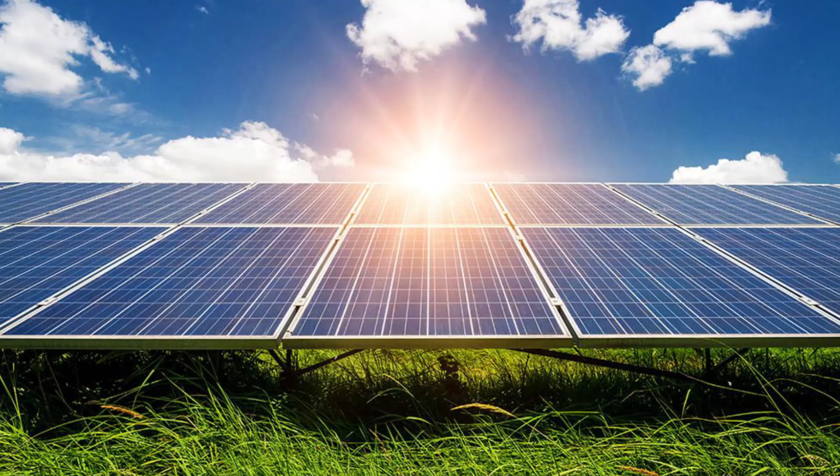Welcome partners and colleagues. Today we are excited to share with you the launch of our new Grundfos Go Solar app and the expansion of the SQFlex renewable energy powered submersible range with 5 new high-speed models. My name is Tom Drew and I am the Global Business Development Manager for the Grundfos Solar product range, and I am pleased to be your host for today's events.

Our presentation will cover the following: Grundfos' ambition within the renewable energy powered water pumping market, a review of our solutions including details on each product's operation range and applications, a visit to our SQFlex factory in San Luis Potosi, Mexico, where you can see how our products are built and quality checks that go into each stage of manufacturing, an outline of the resources that are available to help you select and size Grundfos Renewable Energy Power Solutions. The presentation will conclude with a question and answer period.

With that, I'm pleased to share with you a message from Group Senior Vice President of Global Water Utility Sales, Dieter Sauer. Hello, I'm Dieter Sauer. I'd like to share with you Grundfos' ambition for renewable energy-powered water pumping systems. Today, solar and wind-powered solutions are a growing market, giving people, businesses, and communities the opportunity to use non-traditional energy sources to deliver water. As part of our mission, Grundfos strives to develop pumping technology that not only reduces environmental impact, but also improves the quality of life for people around the world.

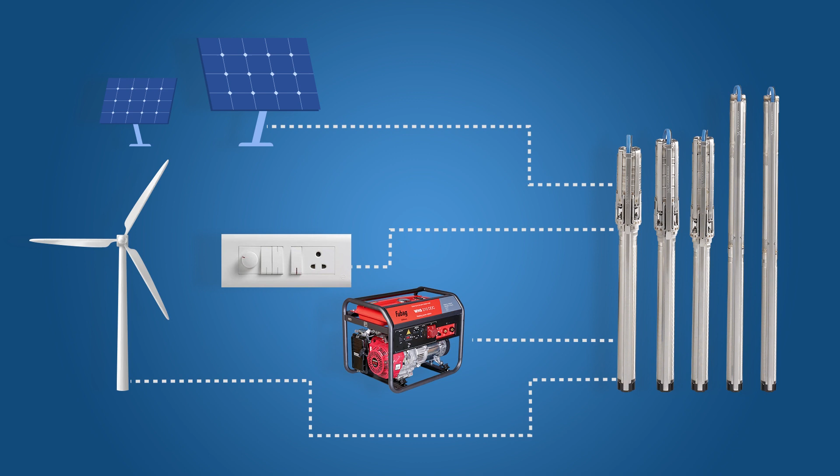SQFlex is by far the most popular Grundfos product when it comes to solar water pumping solutions. SQFlex runs primarily with solar energy with an optional alternate backup power source. Plug and pump. This is how SQFlex can be described in 2 words. Easy installation with no additional components or setup for basic operation, and minimal maintenance makes SQFlex the most user-friendly solar pump in the market. Several 100,000 installations across the globe is the testimony to this feat.

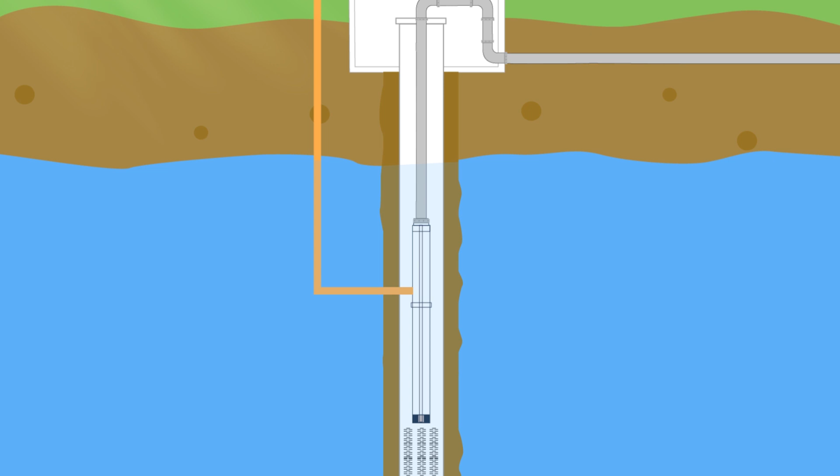Remarkable features that make SQFlex customer-friendly are the built-in electronics that comprise built-in drive and built-in motor protection for optimal performance and protection against external factors that affect the pump performance. Built-in drive offers 4 functional benefits such as the pump can operate with both AC-DC power supply. The pump can run in a wide voltage range, meaning the pump can start early in the morning and go on late in the evening.

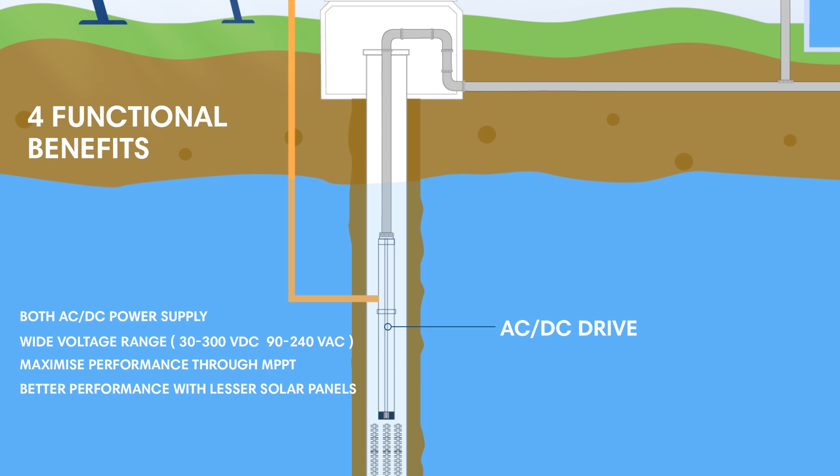The drive has inbuilt MPPT that helps to maximize pump output with available solar energy. The pump delivers higher performance with fewer panels thanks to the high-efficiency permanent magnet motor. Built-in motor protection protects the system against 8 potential risks that might affect pump performance such as over-temperature, surge protection, over-voltage, under-voltage, overload, dry running, polarity protection, and hydraulic shock.

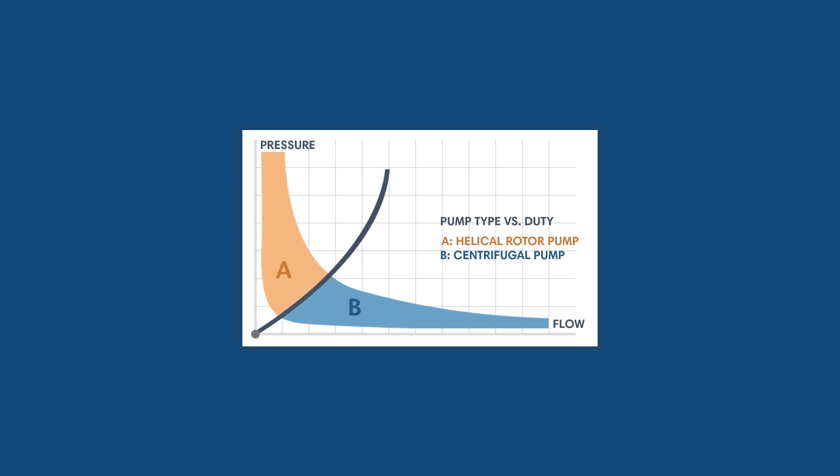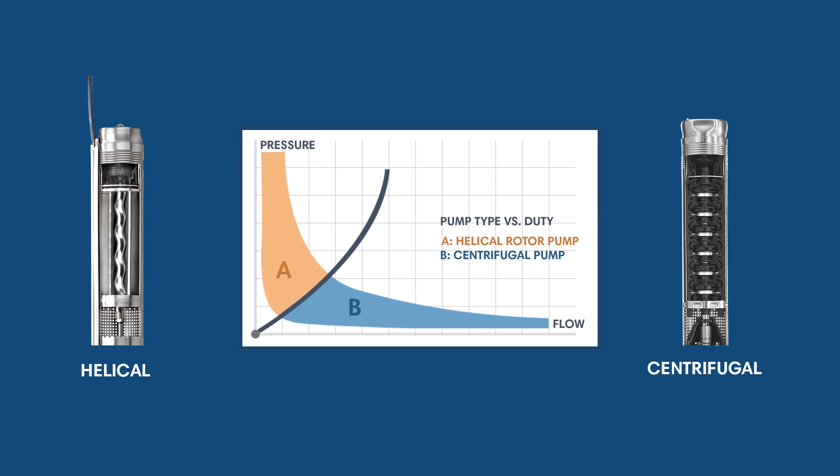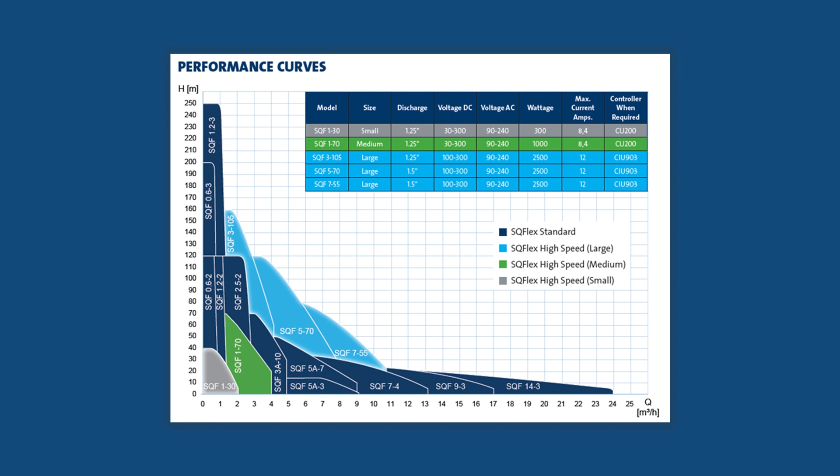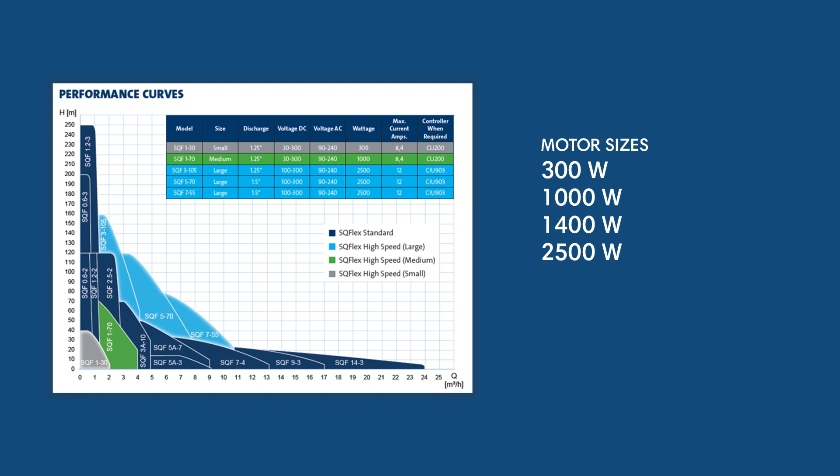Speaking of the design, the SQFlex product line is available in 2 different hydraulic designs, Helical Rotor and Centrifugal. The Helical design is good for low-flow, high-head applications, whereas Centrifugal design is suited for high-flow and low-head requirements. With the addition of 5 new hydraulics in small, medium, and large sizes, SQFlex is now available in 16 different models. These 16 models are powered by 4 motor sizes, 300, 1000, 1400 and 2500 watts, and are available in 2 material variants, SS304 and SS316. The entire range gives the flexibility to the users to customize the system, regardless of the location, depth of water, and volume required.

Though the pump has built-in features for optimal operation and motor protection, CU200, an external controller, can be connected to monitor the performance of the pump. We can also monitor the system performance remotely through GRM, Grundfos Remote Management, by just adding the Grundfos CIM module. Grundfos GRM works through the GSM network.

SQFlex is used in a variety of application areas. It is specially suitable for supplying water in remote locations, but it can also be used in commercial buildings such as schools or hospitals, farms, lakes, and in conservation areas. Next, we are going to shift our focus on SQFlex.

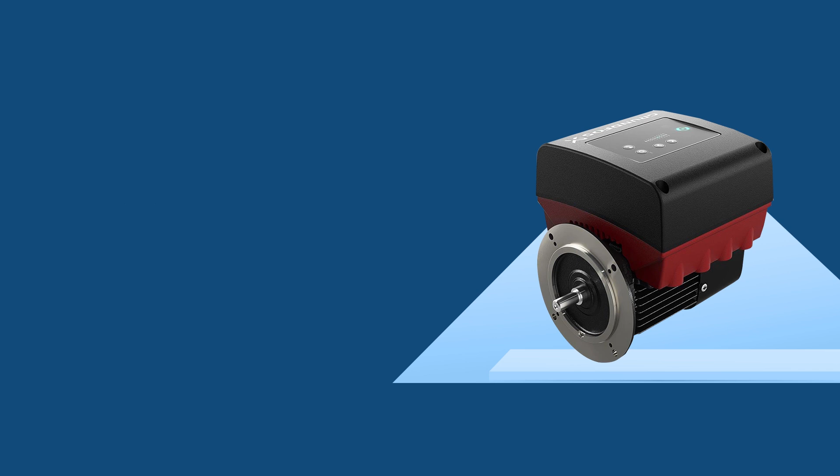Now, let's look at how Grundfos MGFlex motor utilizes solar power for applications where CR pumps are typically used. MGFlex has been developed by Grundfos specifically to be used in surface pump applications using solar power. It runs with permanent magnet technology with a built-in inverter that helps the motor to operate at maximum efficiency. This allows the MGFlex motor to provide the CRFlex surface pump with necessary power to be used in remote rural applications including irrigation, community water supply and livestock watering.

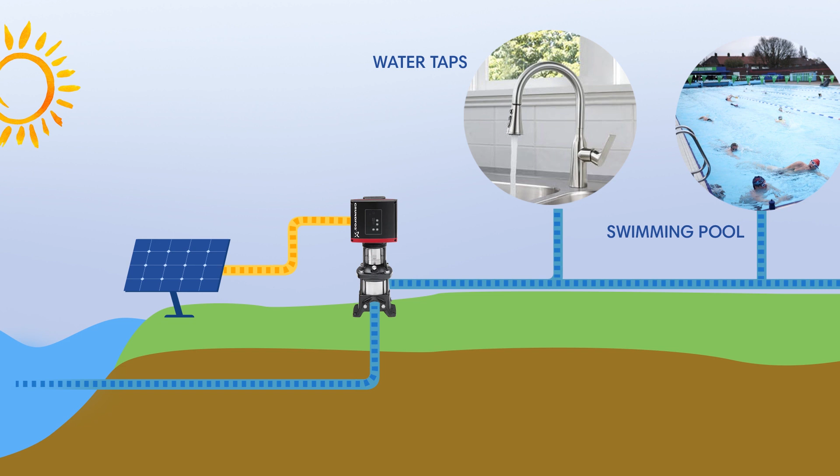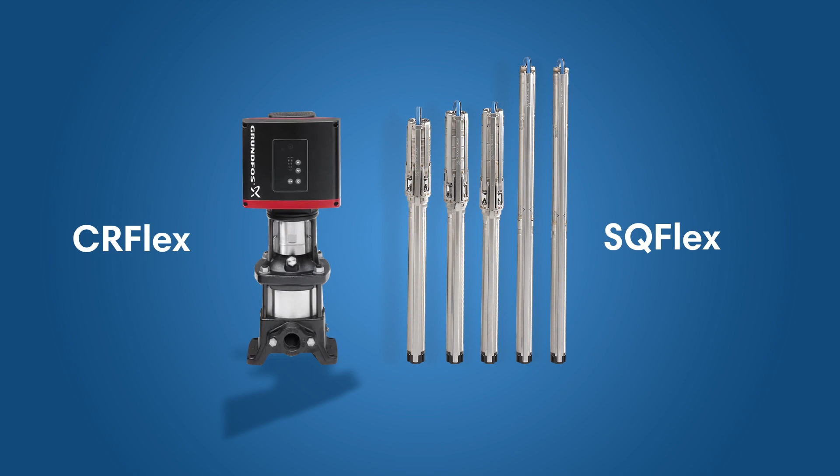It can also provide power to CRFlex pumps in domestic buildings in rural areas or towns. Relevant applications in this respect include a pressure boosting system to ensure reliable pressure at the tap and swimming pools. In many ways, the advantages of the CRFlex running with MGFlex motors mirror those with the SQFlex pump. For instance, both pumps can be tailored and customized to any application and local conditions, meaning that they are delivered as plug-and-play solutions, which also ensures it is very easy to install.

Its built-in protection means that it requires very little maintenance, and finally, its high efficiency results in the requirement of a lesser number of solar panels, thereby reducing the cost and space required. Furthermore, MGFlex is a versatile product that can be connected to a number of different pump types.

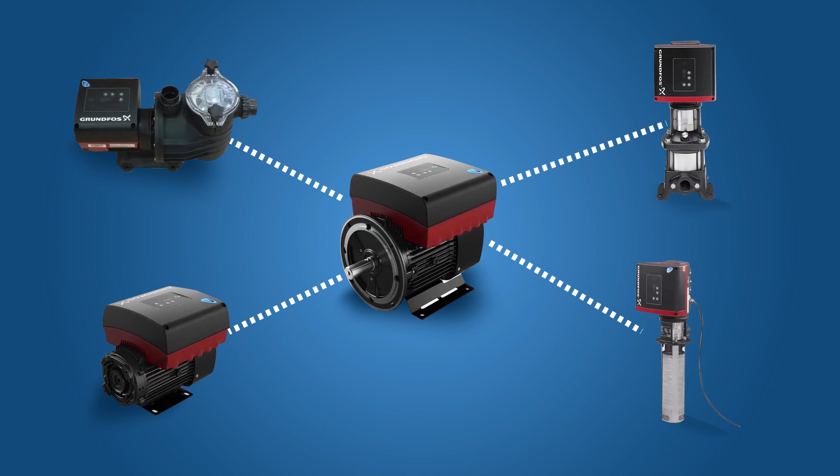Grundfos Renewable Solar Inverter. The RSI is an external drive designed to convert DC power from solar panels to AC power supply for pump operation. RSI is designed to operate a broad range of three-phase submersible and surface pumps. Grundfos RSI, which were running pumps up to 37 kW, 50 HP, since their launch in 2016, can now power a variety of pumps up to 250 kW, 340 HP. This helps us to use solar energy for various municipal, irrigation and industrial pumping applications. What makes RSI unique in the market is that it is extremely quick to set up.

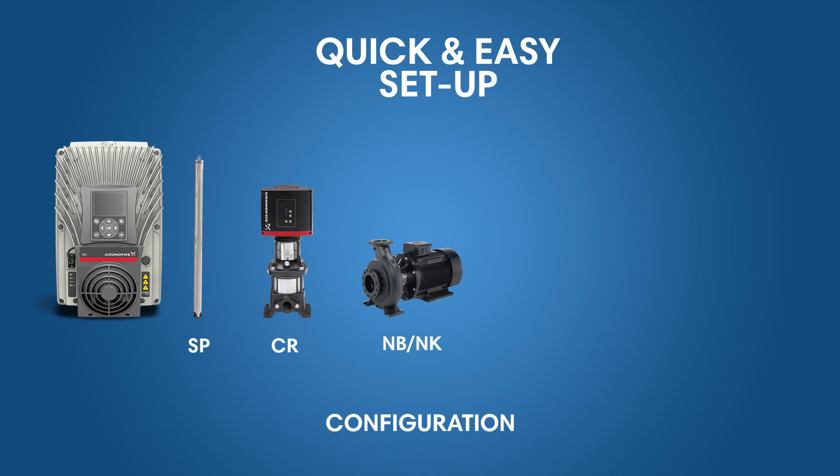The quick setup wizard helps one to configure the inverter for a number of Grundfos pumps such as SP, CR, NB, NK, CM, MTR and TP in just less than 5 minutes, demonstrating its flexibility and unmatched simplicity. All you need to do is to confirm which pump type is in use and enter basic motor and panel details. The RSI is up and running.

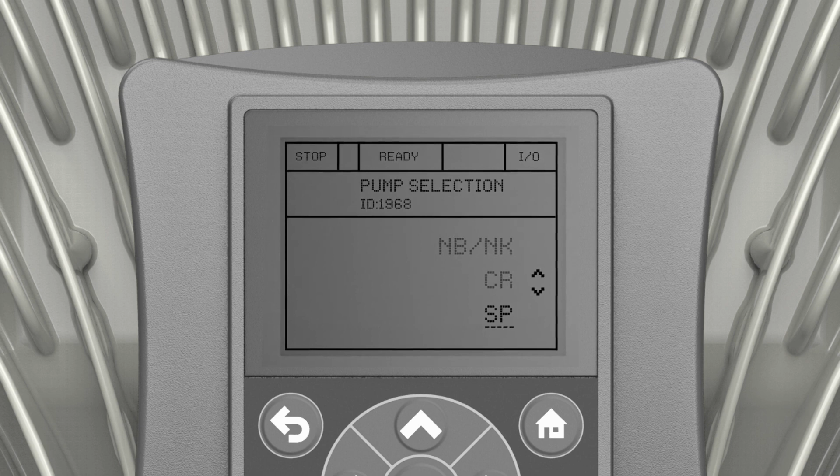RSI is even easier when set up in the workshop for plug and pump on site. RSI along with the Grundfos SPE submersible pump with high efficiency permanent magnet motor forms the best-in-class solar pumping system up to 45 kW, 60 HP, that requires fewer solar panels and less space. The RSI comes standard with an IP66 weatherproof enclosure up through the 37 kW, 50 HP model, eliminating the need for any other outdoor protection.

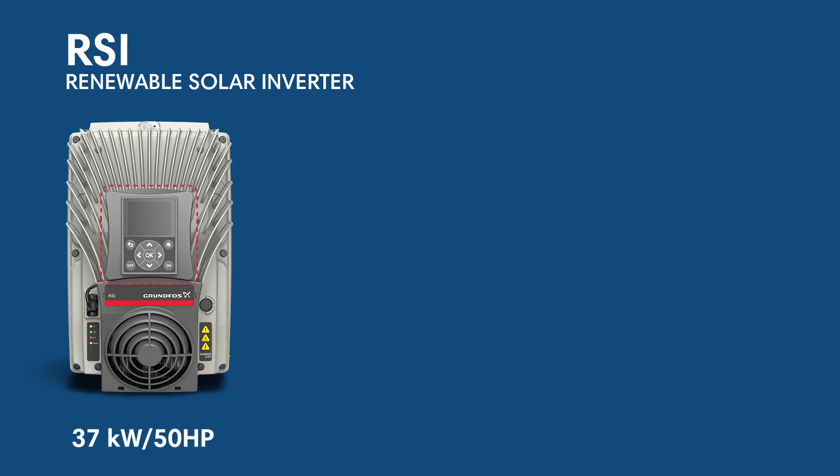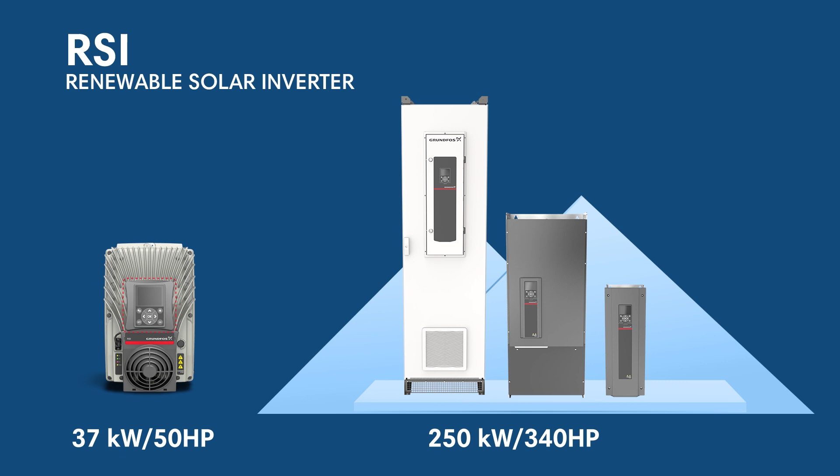Another noteworthy benefit is that the electronic display on the inverter is removable and helps prevent the settings from being tampered with. It can also be passcode protected. RSI above 37 kW, 50 HP are available in IP21 and IP54 enclosures.

Grundfos takes pride in continuously providing innovative water solutions and setting new benchmarks. The Grundfos Power Adapt is no exception. Maintaining a constant power supply in a solar pumping system is a challenge, but Grundfos Power Adapt combined with RSI makes it possible. Pumping applications like water treatment, pressure boosting and municipal water supply need 24/7 constant power supply to enable continuous operation. Providing consistent solar energy through inverters is not possible throughout a 24-hour day. To ensure continuous power supply for the pumps, Grundfos introduces the Power Adapt.

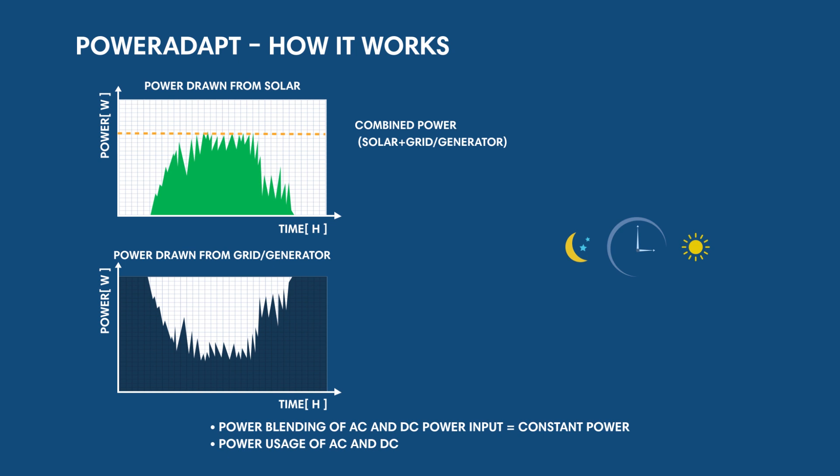When installed with the Grundfos RSI, power can seamlessly be blended together from two different sources, DC and AC. The RSI will use DC solar energy as the primary source and blend in AC power when required to ensure the pump and motor operate at top performance. The Power Adapt will protect the system to allow continuous operation 24/7. Power Adapt is compatible with Grundfos RSI up to 37 kilowatts, 50 HP, and the enclosure is rated for outdoor installation. Other salient features include protection against phase loss, over temperature and backfeeding, a power on delay timer for automatic coupling back to AC, and remote monitoring compatibility.

Go Solar app. Adding to all this, Grundfos has launched a successful mobile solar sizing app for quick and easy sizing on the go. The Grundfos Go Solar app is a simple tool for complex sizing needs to break boundaries not only geographically but digitally. The built-in tools and calculators allow you to size solar-powered systems. The app is available for Android and iOS operating systems in 5 different languages. Download now and let's make your sizing process easy.

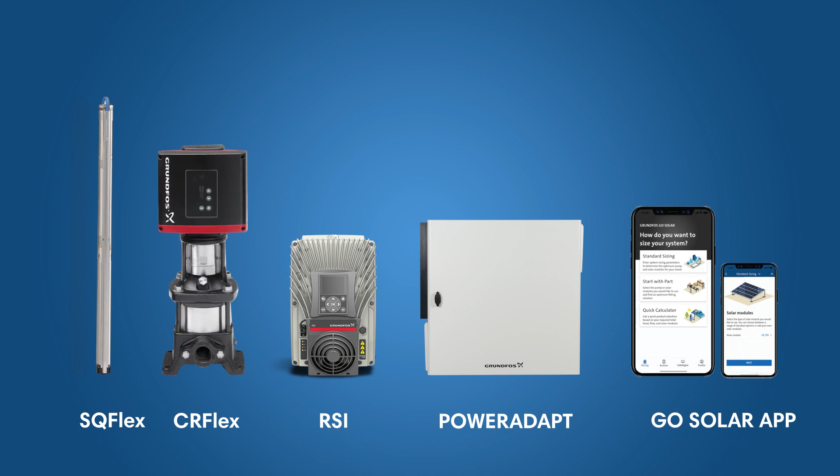Conclusion: that covers features and benefits of the entire range of the Grundfos solar product portfolio: SQFlex submersible pump, CRFlex surface mounted pump, RSI Renewable Solar Inverter, Power Adapt, Power Blender and Grundfos Go Solar app. A solar pumping system using any of these Grundfos products ensures not only reliable operation but also energy efficient and cost efficient solutions.

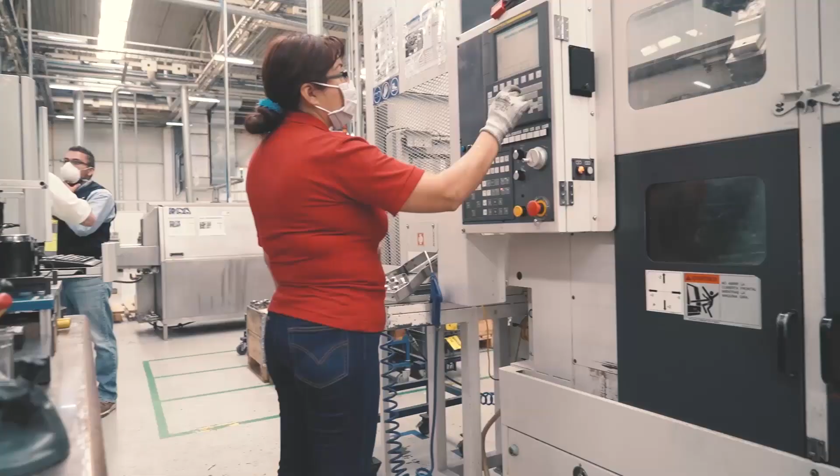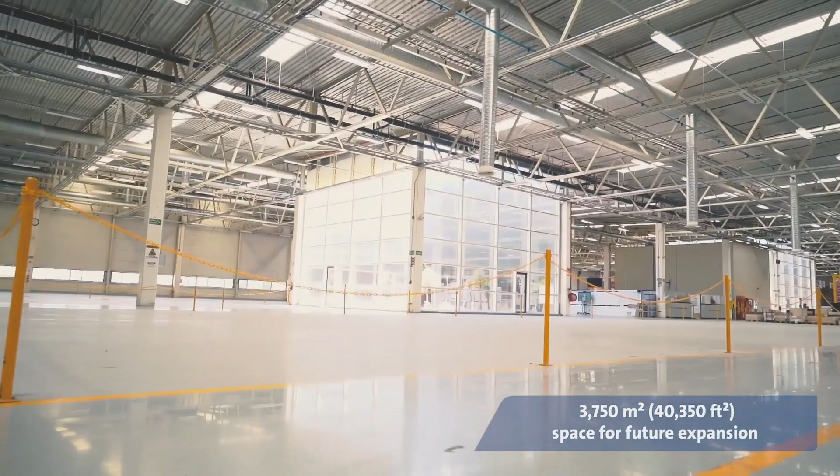Welcome to the Grundfos San Luis Potosi, Mexico manufacturing facility. This 15,000 square meter, 161,400 square foot facility has been in operation since 2007. Currently, there are 280 employees, including engineers, quality inspectors, machine operators, and assembly technicians. There is also about 3,750 square meters or 40,350 square feet of available space under roof for designated expansion with enough adjoining property to double the facility's current size.

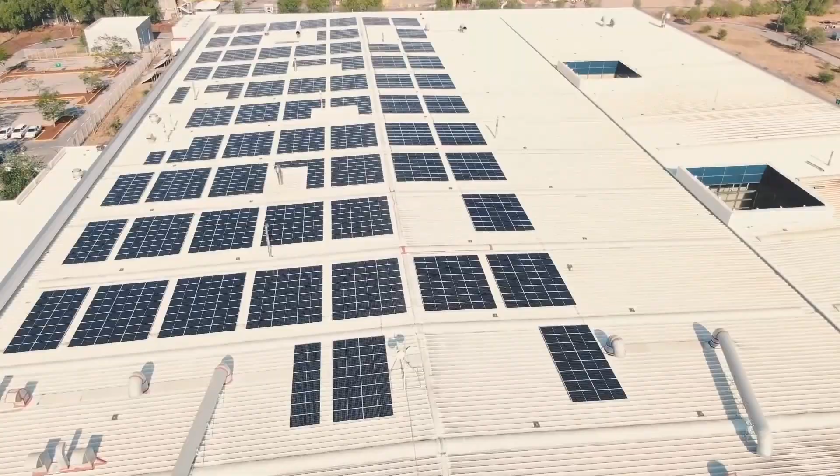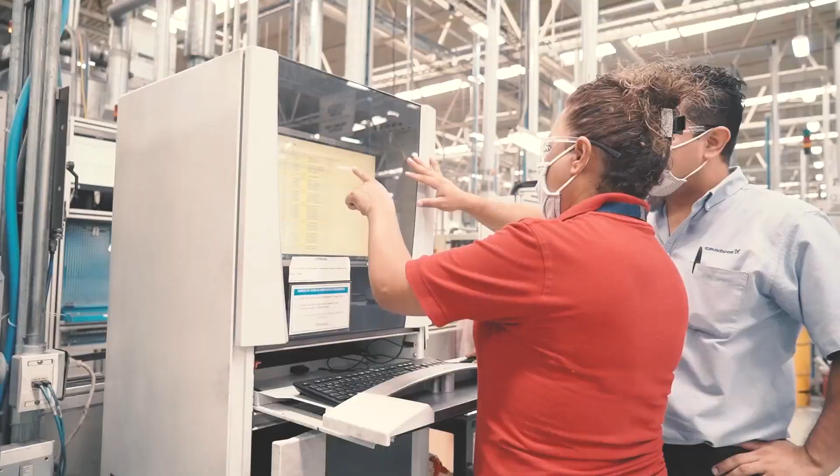On average, this facility will produce 172,000 pump and motor units per year. 49,000 plus of those units are SQFlex solar products. Grundfos San Luis Potosi is certified to 3 current ISO standards and has received numerous awards in manufacturing excellence and safety. Today it is my privilege to introduce you to the team of experts at Grundfos San Luis Potosi to show you our SQFlex submersible pump and motor assembly operation. This includes our 5 new high-speed SQFlex models, which we are excited to be releasing into the market.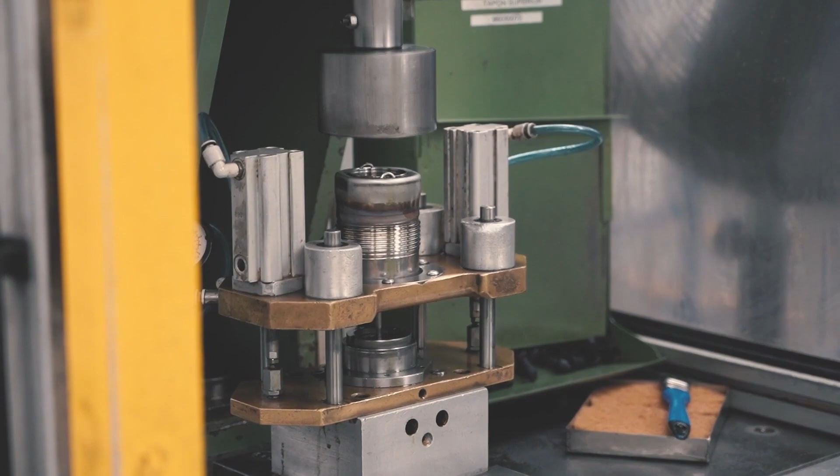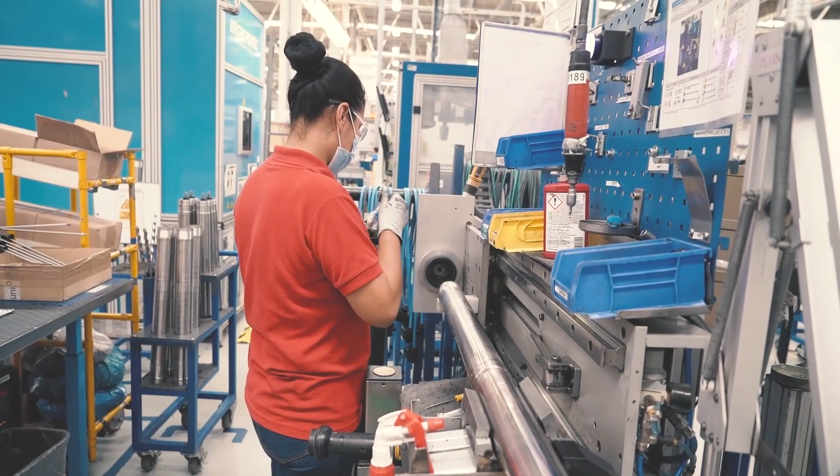The SQFlex is Grundfos' renewable energy, solar, DC, and AC powered submersible pump and motor. It includes many built-in features and benefits not found in any other products. The manufacturing and assembly process includes components from several Grundfos sister facilities and qualified vendors from around the globe. With over 100 quality checks, we can assure you, our customers, that you receive a quality product that will provide reliable service for years to come. So, let's get started.

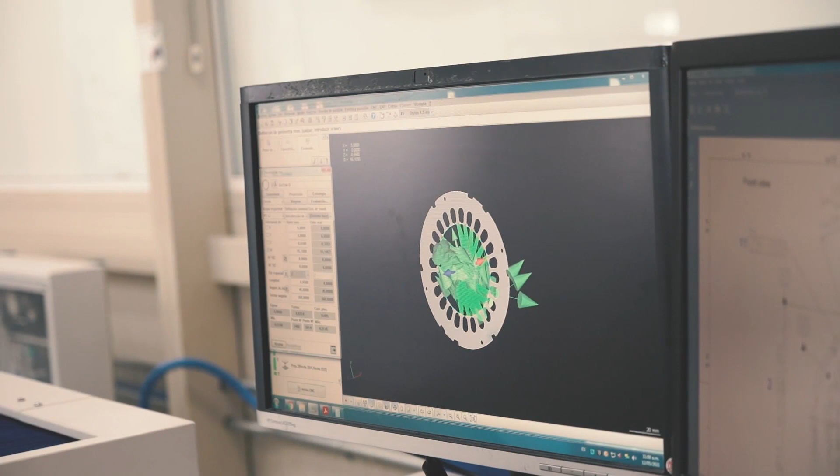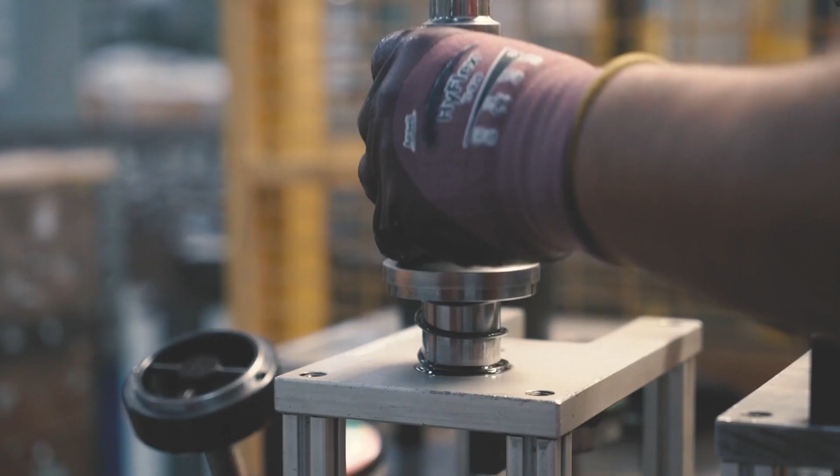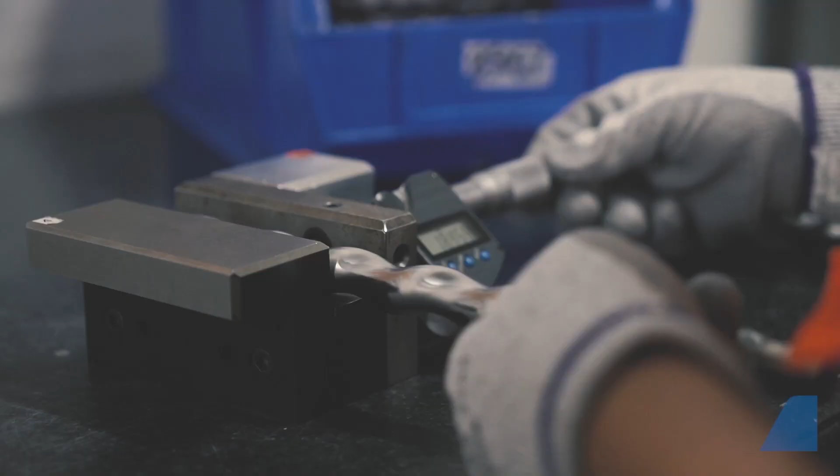It begins with our incoming quality inspection and machining center. Motor electronics are received from our Grundfos sister facility in Denmark. These components are pre-tested and inspected by our colleagues before their arrival here and assembled with the motor. Helical rotor and stator components are reviewed, measured, and matched per assembly specifications.

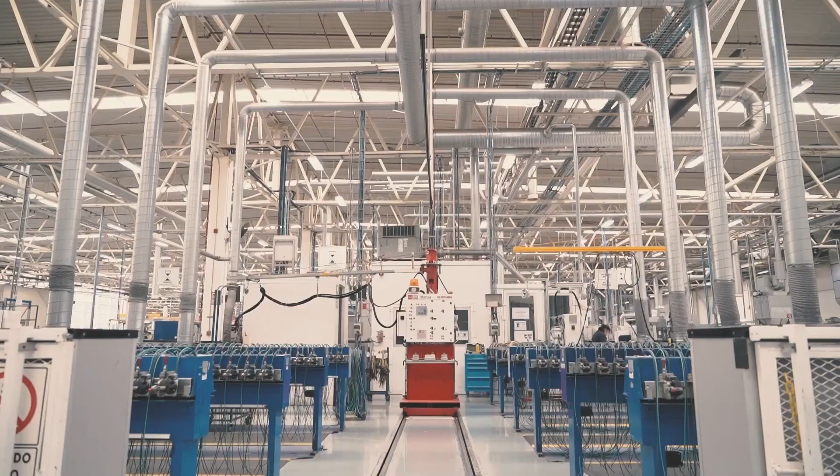Key components such as motor lamination stacking, windings, and motor leads, along with many other components, are all Grundfos in-house manufactured and tested. This assures that our high-quality standards are maintained and these components are readily available. Subassemblies such as the discharge head with non-return check valve are assembled, welded, and tested, all prior to being sent to be part of the final pump assembly.

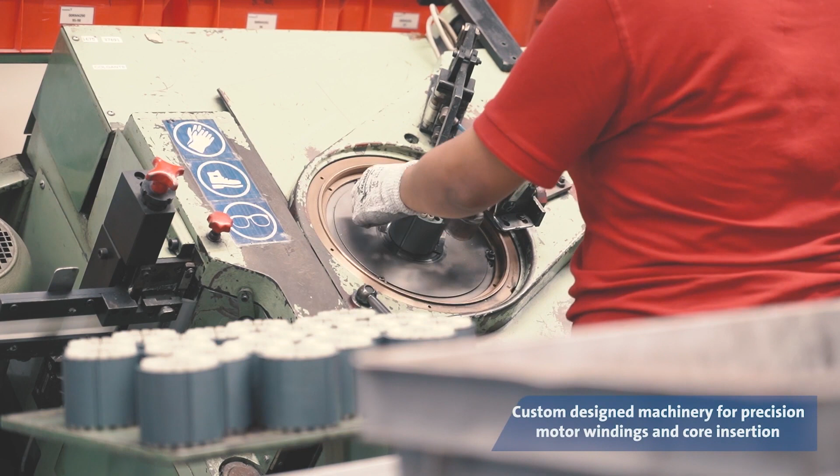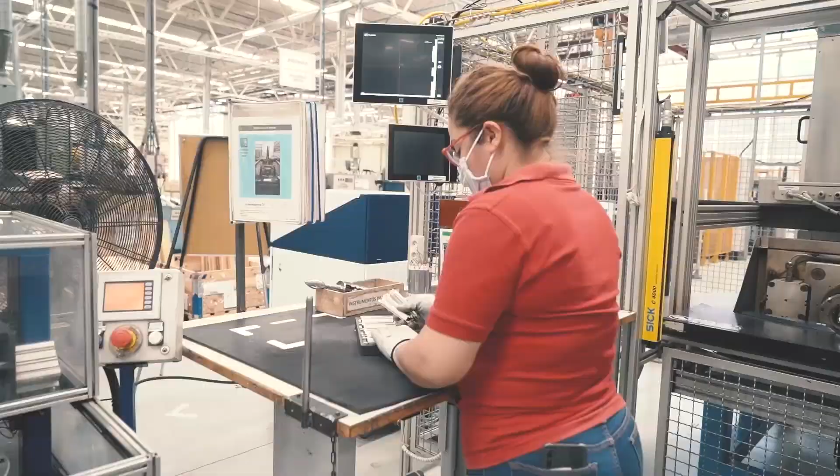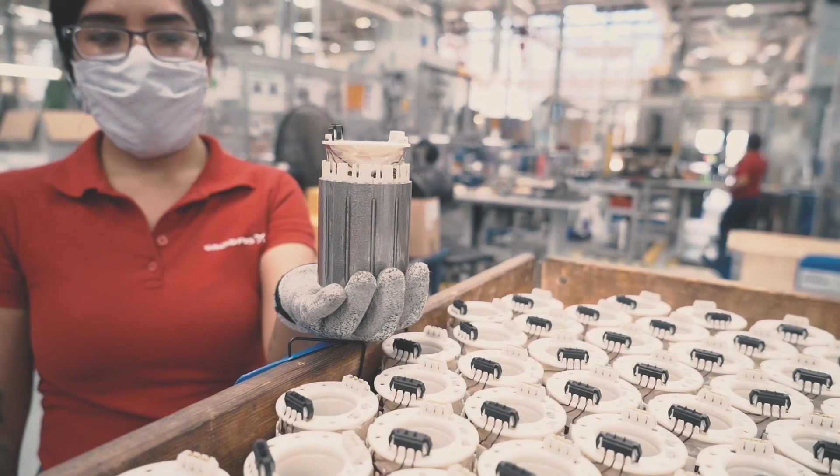Precision motor windings and core insertion are controlled with Grundfos-specific designed machinery. All pumps and motors manufactured in San Luis Potosi are assembled by highly skilled and trained certified personnel. Once the motor stator winding assembly is complete, it is ready for testing. All stators are tested to ground and resistance is measured along with a high voltage test.

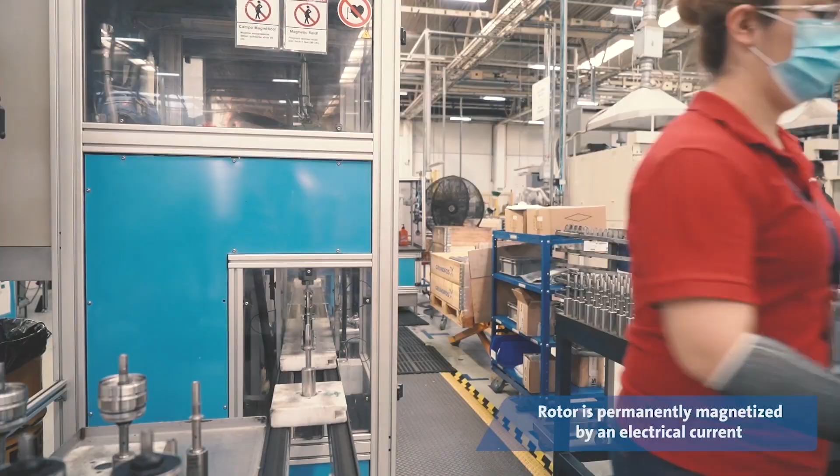In a separate process, the rotor that has been pre-tested in Denmark is magnetized by applying an electrical current. This process permanently magnetizes the rotor. The magnetized rotor, rotor can, thrust bearing, and connector are all then welded together before being glycol filled and sealed. The rotor unit assembly is now complete.

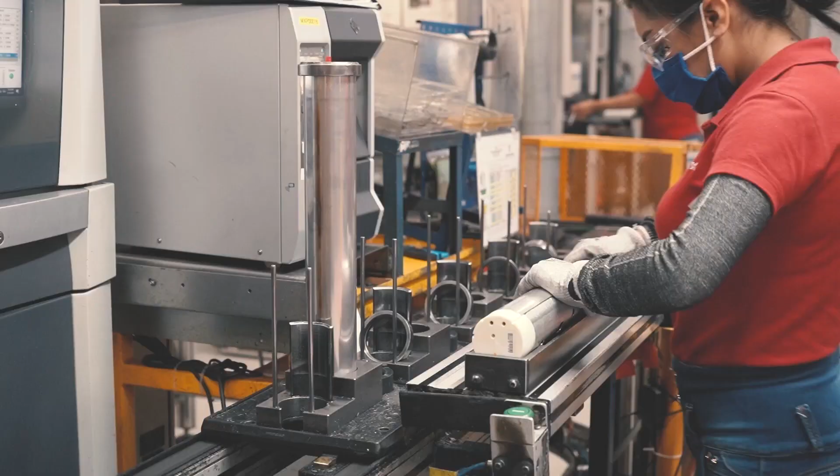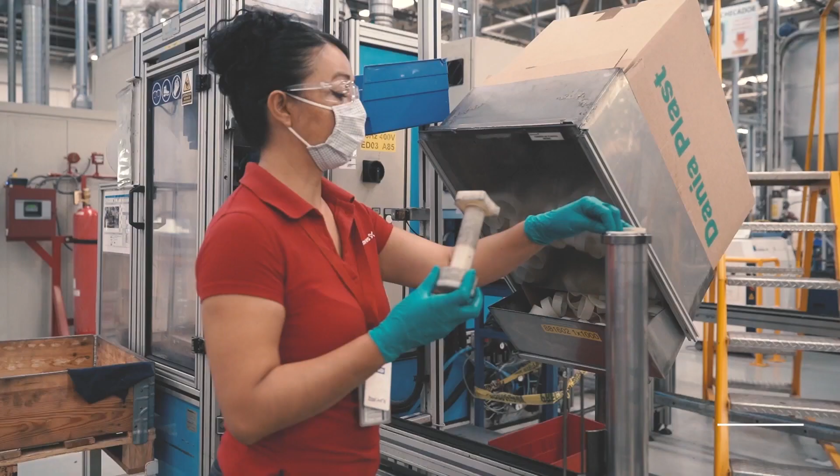The stator, electronic unit from Denmark, motor sleeve, and completed rotor unit are all then delivered to the motor assembly technician. These components are inserted in the motor stainless steel sleeve and pressed to assure proper placement. The motor end caps are added and the assembly is then welded together.

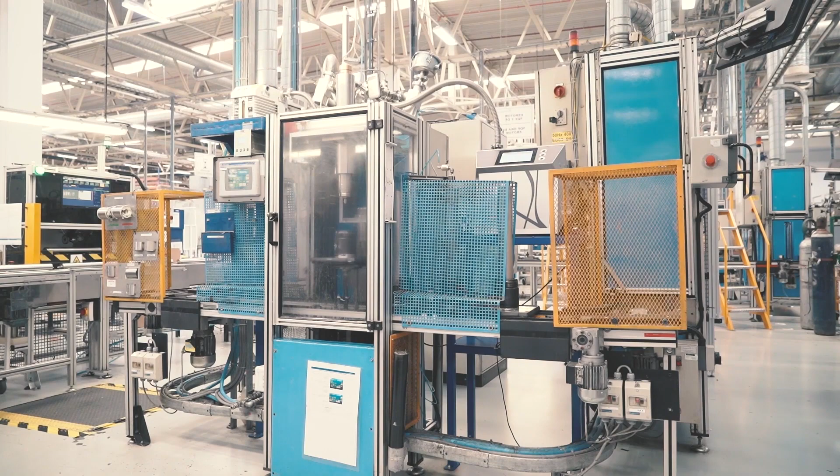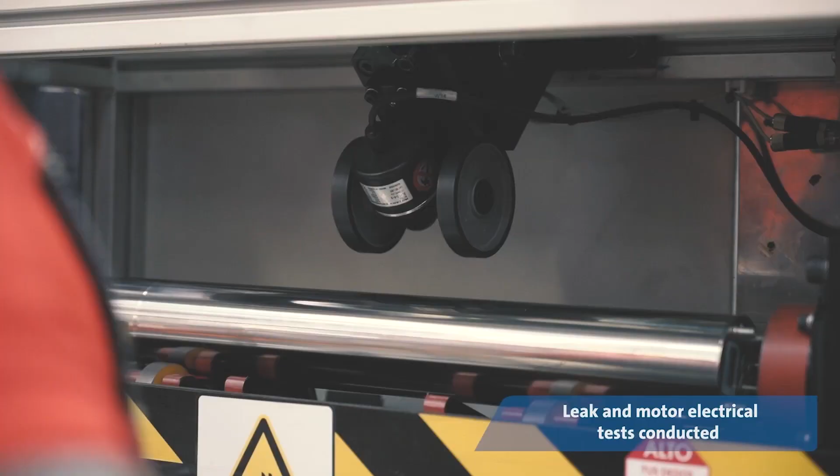The assembly must then pass a stringent leak test. This proprietary test allows any inconsistencies in the weld and seals to be quickly detected. Once the leak test is completed, the motor receives a full electrical test. Rotation, RPM, voltage to ground, resistance, and a high voltage test is conducted.

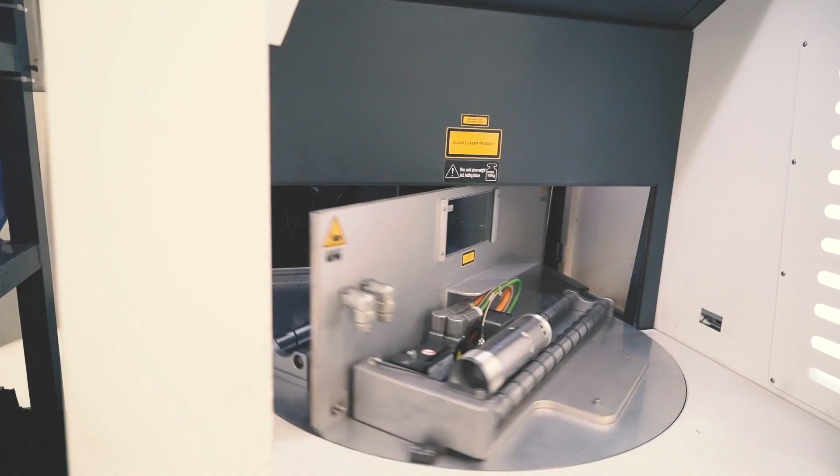Finally, an automated visual inspection is made, taking up to 40 photos of the welded seams, comparing them to 15,000 preloaded pictures looking for inconsistent welds and imperfections. Each motor will be assigned a unique serial number and the motor nameplate is engraved on the outer stainless steel sleeve. The Grundfos SQFlex motor is now ready to be mated and assembled to a pump end.

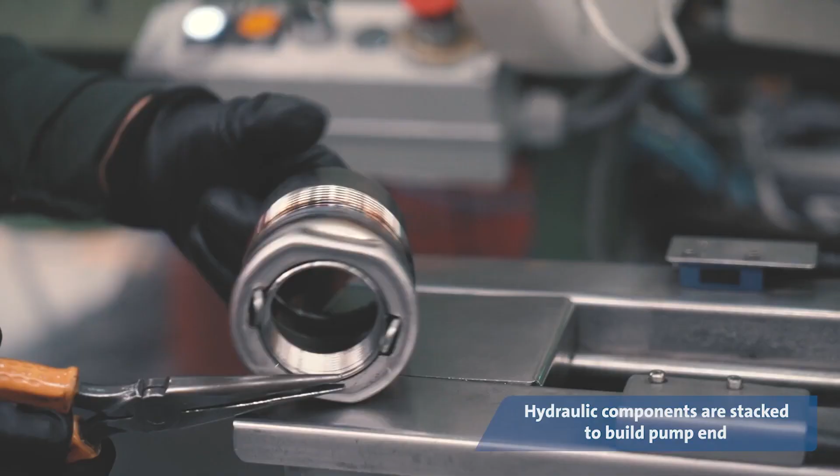Once a work order is generated, the team starts to assemble one of the most highly engineered pump products in the industry. Hydraulic components are stacked before being fitted onto the pump shaft. These in-house components are engineered for high efficiency to deliver water flow at the correct head pressure. Care is given to seat each component correctly so that the water flow is properly and efficiently directed from one hydraulic stage to the next.

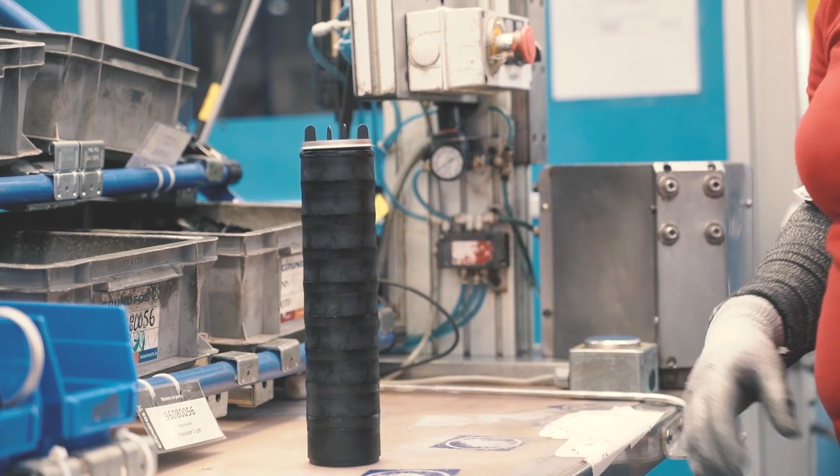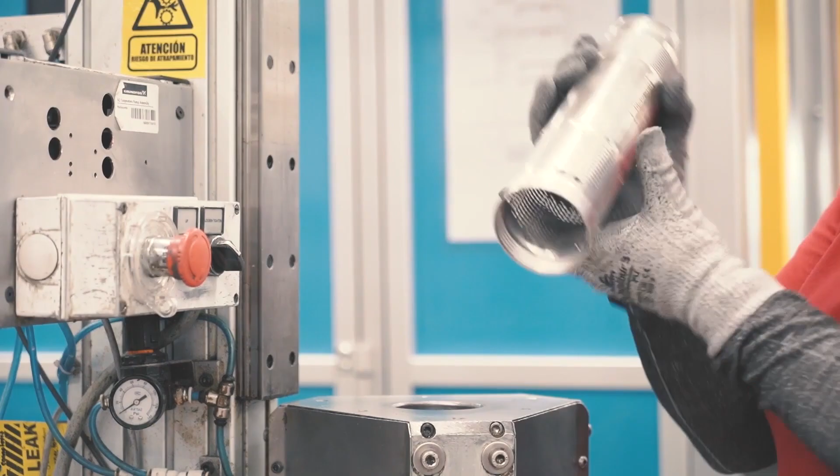At the bottom of the hydraulic stack is a center bearing. This bearing keeps the lower portion of the hydraulic stack in alignment. The hydraulic assembly is inserted into the pump shell and the discharge head and its components are then added. The top bearing in this assembly is a key component to make sure the pump shaft along with the hydraulic stack continue to stay in perfect alignment. Misalignment of the hydraulic components can cause premature wear and shorten the pump's operational life.

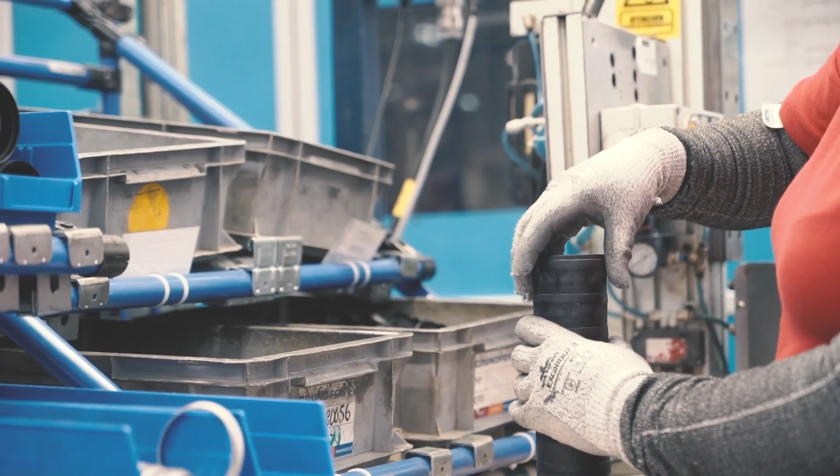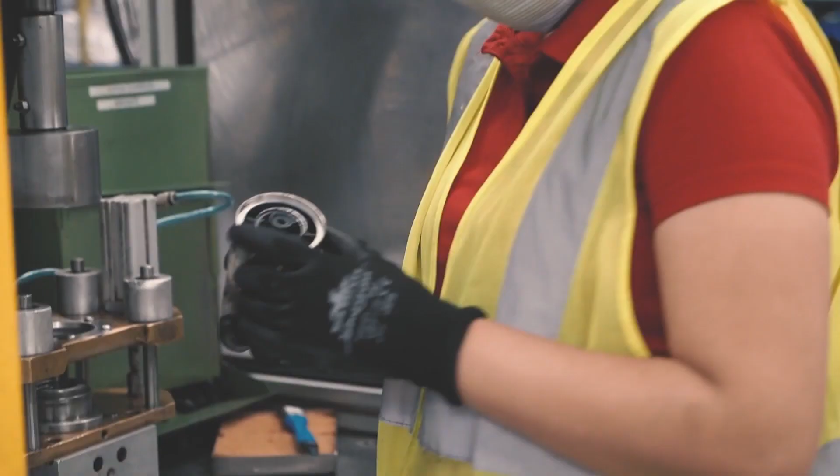The check valve or non-return valve, which is a standard feature on all Grundfos products, keeps water from flowing back down through the pump when it is not operating. This helps keep the system from experiencing a plumbing system hydraulic shock, sometimes referred to as water hammer, when the pump starts. The completed assembly is then torqued to specification. The motor lead guard is then attached to complete the pump end unit of the assembly.

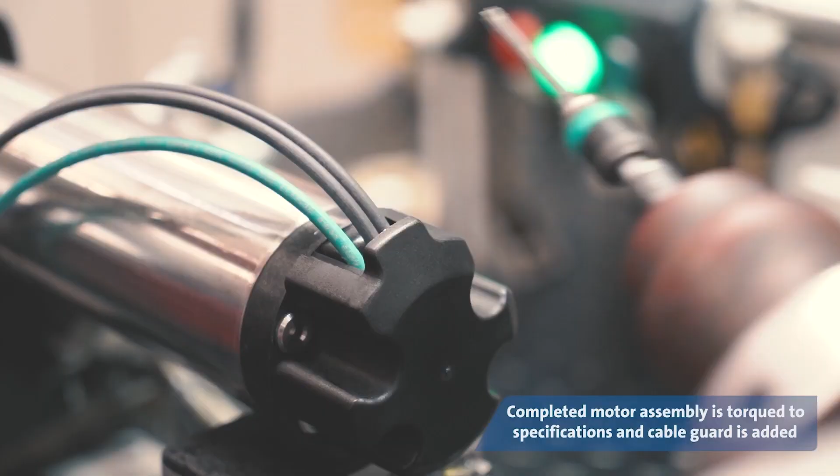Pre-inspected Grundfos manufactured stainless steel components are delivered to the assembly technician per the work order instructions. The motor intake bracket and shaft are placed in the assembly fixture. The technician then assembles the stainless steel hydraulic stages over the pump shaft, making sure each stage is properly fitted. The pre-assembled discharge head with non-return valve and top bearing are then added to the top of the hydraulic assembly.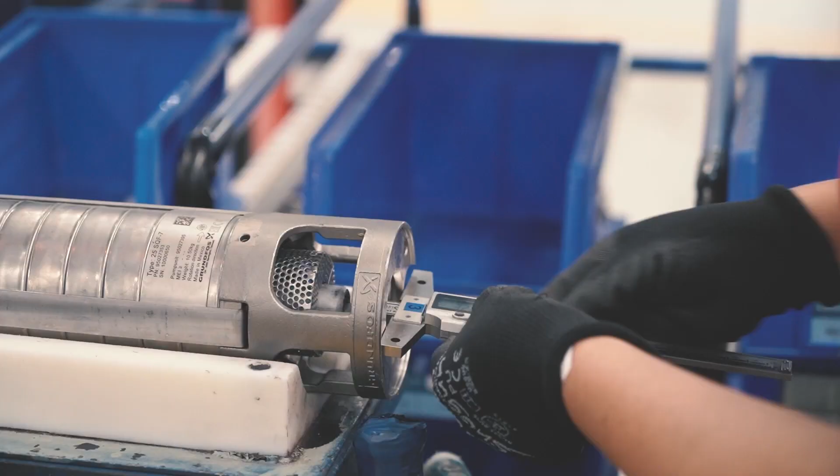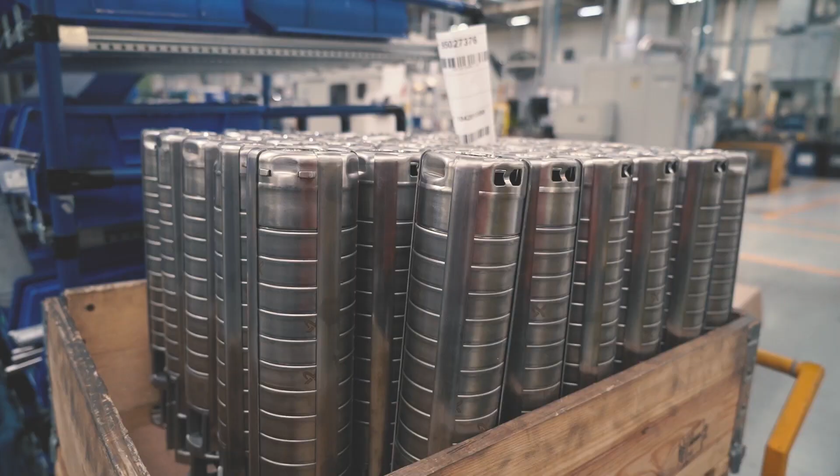Stainless steel straps are then fitted to the hydraulic stack and torqued to make sure the assembly has proper compression on the components to allow the pump to operate at designed efficiency. Once the shaft height is measured and ease of rotation is checked, the pump assembly is now complete and matched to a pre-tested flex motor, and the completed unit will undergo the same stringent testing with all the results recorded and saved by serial number for traceability.

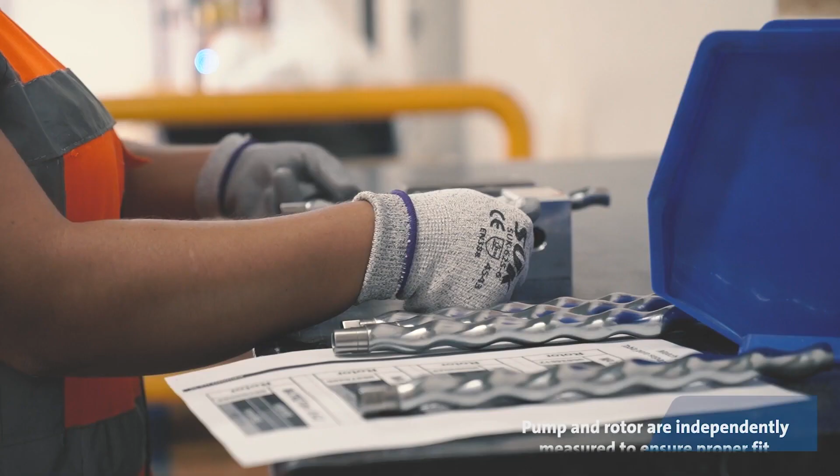A critical quality task in the assembly of the SQFlex positive displacement pump is the matching of the pump rotor and stator. These two components are designed to operate as an interference fit. Both components are independently measured. These dimensions are then recorded so that rotor and stators can be matched together according to strict specifications before assembly. This quality check assures the pump end will operate correctly and to its design performance.

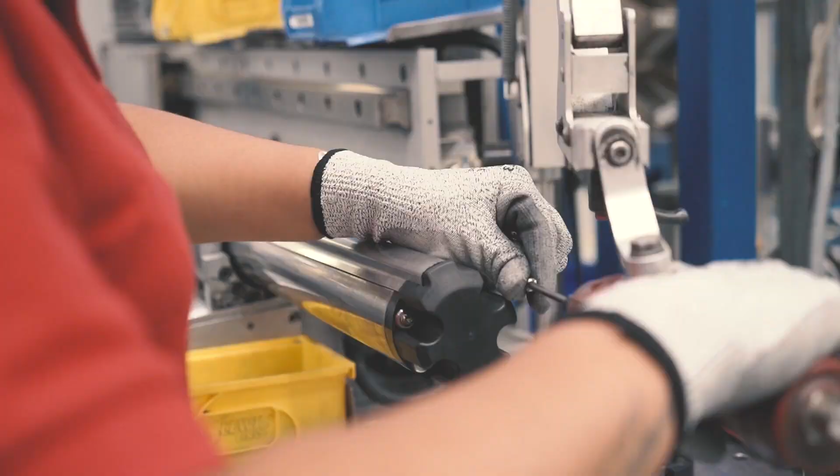The flex shaft with the sand slinger is then attached to the rotor. The matched stator portion of the pump is inserted and centered into the pre-welded pump shell. All of the components, including the pre-tested motor, are then placed into a Grundfos designed and manufactured fixture to be torqued to specification as a complete unit. This process also fits the pump, rotor, and stator together. The completed pump and motor unit is now ready to be wet tested.

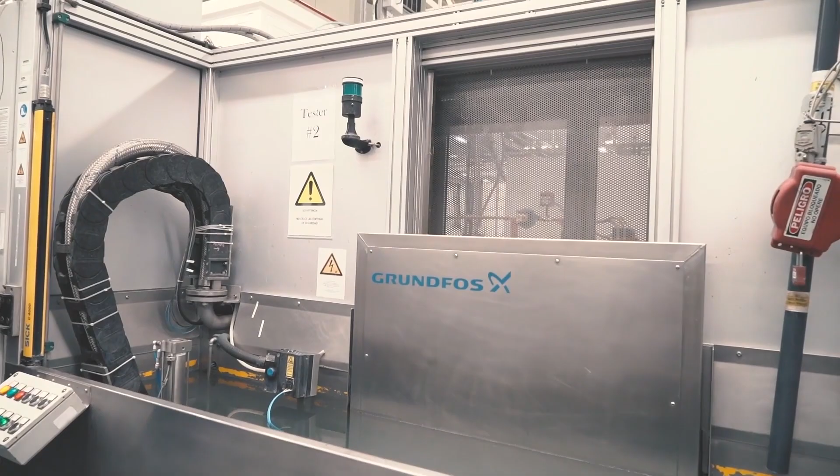All SQFlex pumps are 100% wet tested as a pump and motor unit. The test equipment is specifically designed by the Grundfos Advanced Manufacturing Engineering team. Once the technician scans the serial number, the machine loads the test criteria specific for the pump and motor, and an automated test is performed with DC voltage.

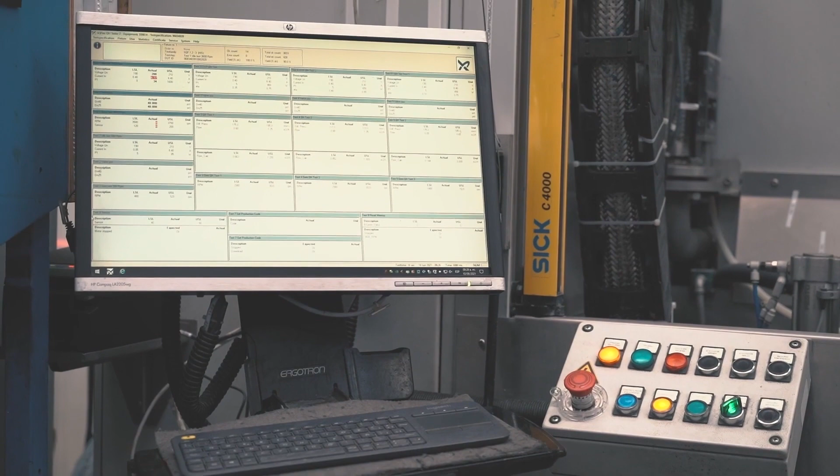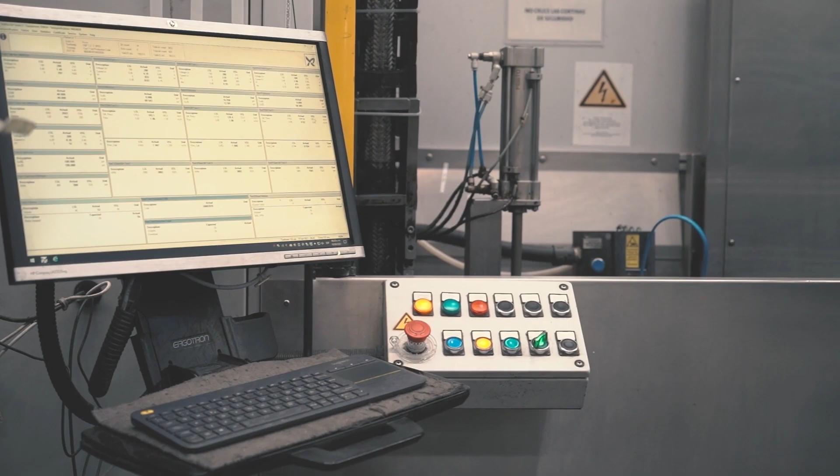Pumps are first tested at shutoff pressure. This means the pump is operating at full speed and the discharge valve is completely closed, so there's no water flow. Data points are then taken and recorded. The test machine then opens the discharge valve to allow the pump to operate at the designed rated flow of the pump. For example, a pump that is rated for 10 gallons a minute will be allowed to flow water through the system at exactly 10 gallons per minute.

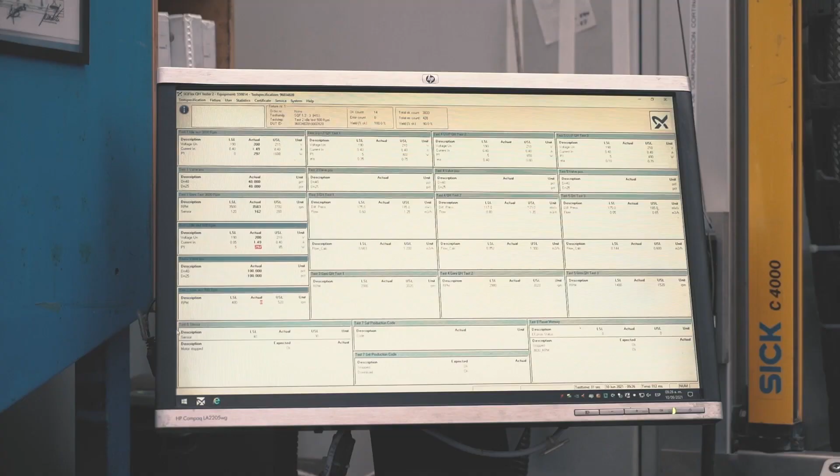Helical rotor pumps are tested at 3 points of the performance curve. At each performance point for all the pumps, the rated flow, the operating pressure, watts, and motor current is collected and recorded per serial number. The pump and motor units are then lifted out of the water to expose the dry run safety sensor to test that the motor stops if the sensor is out of the water.

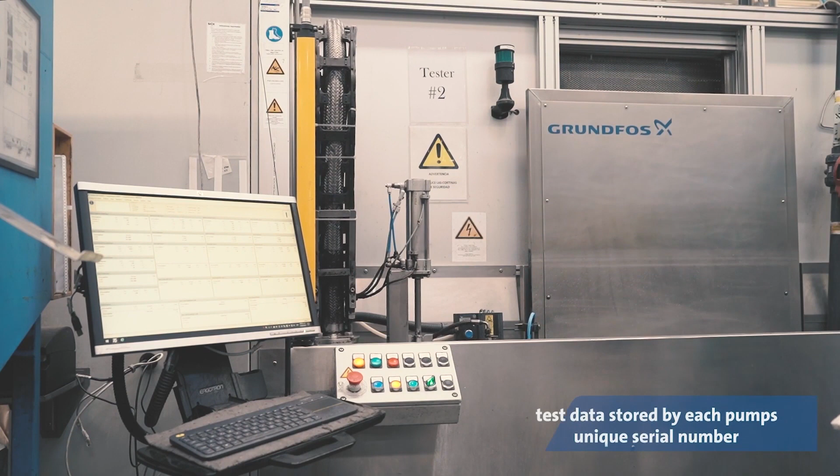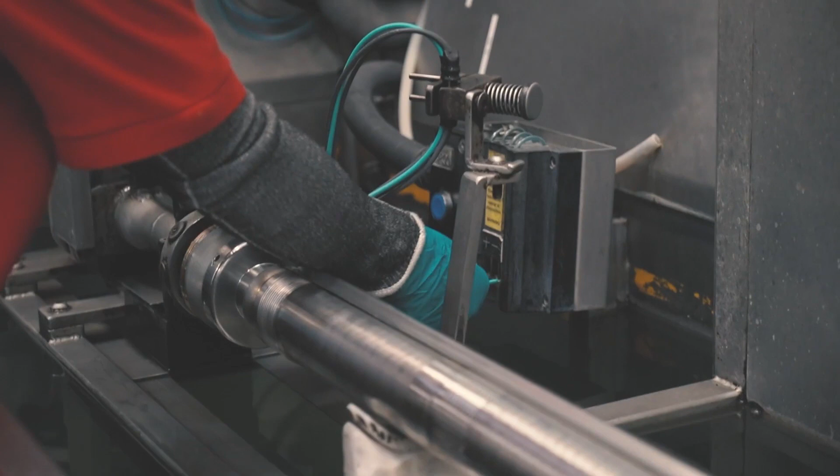To avoid any misinterpretation of the data, a green or red light is displayed as pass or fail of the test conducted. Again, once the pump has passed this operational test, the test data for each pump is recorded and kept by serial number. This allows us to trace the performance of any pump and motor unit if needed in the future. These pumps, whether a centrifugal or a positive displacement design, are then drained and packaged in its carton for shipment.

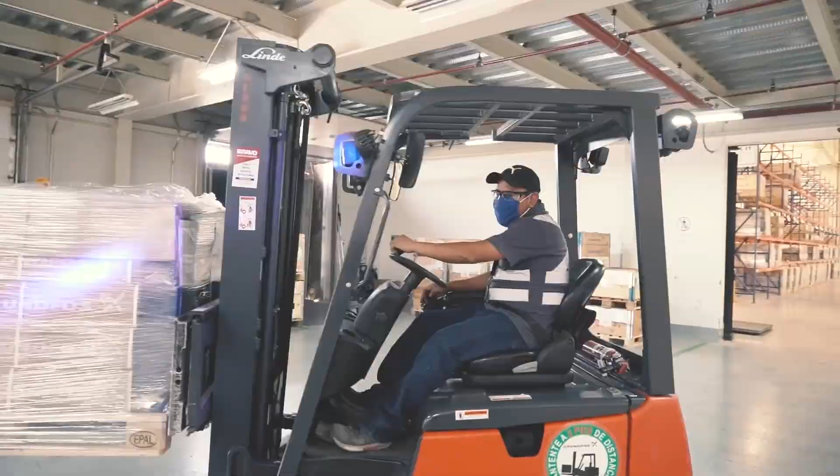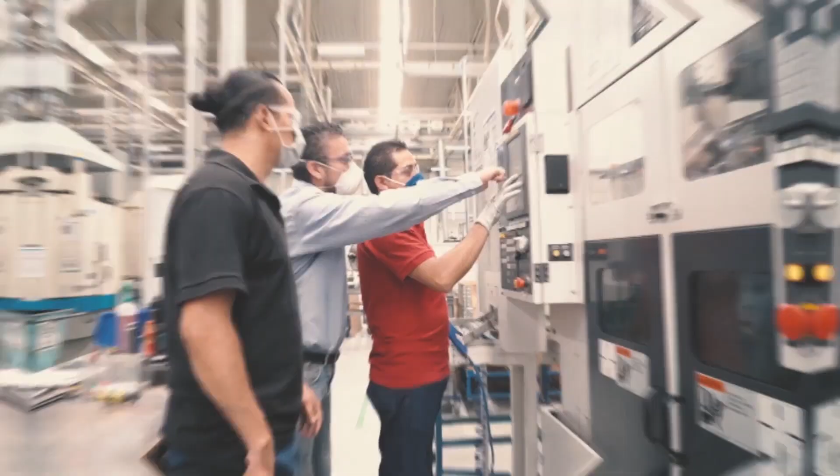Everything we do at Grundfos is centered around building and providing you with a quality product that you can be confident in. Our promise is to continue to be innovative and diligent to take every opportunity improving our manufacturing, assembly, and testing processes. Our goal is to win at water, developing smarter ways and pioneering sustainable solutions to global challenges.